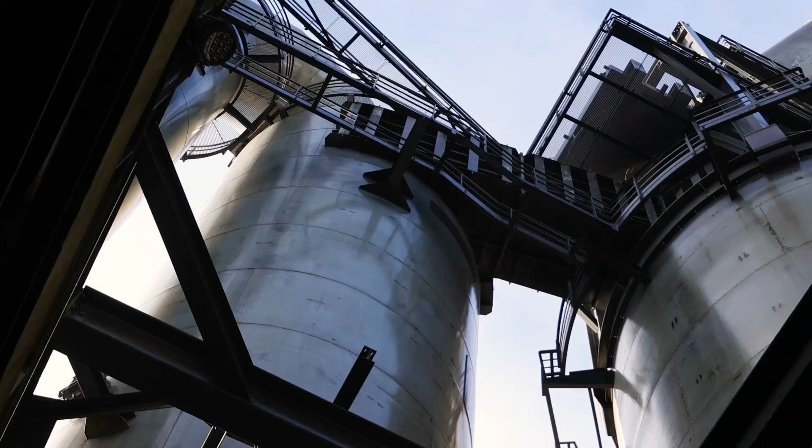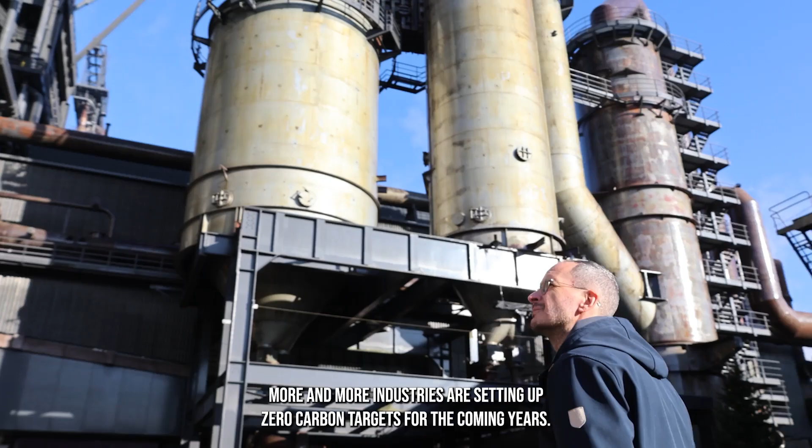Considering the effects of climate change on our society, more and more industries are setting up zero carbon targets for the coming years. Since the major source of emissions relates to energy consumption, renewable energies and hydrogen are key solutions to overcoming this challenge. But what if industries improve their energy efficiency first? In particular, what if they recovered and valorized excess heat instead of letting it go to waste?

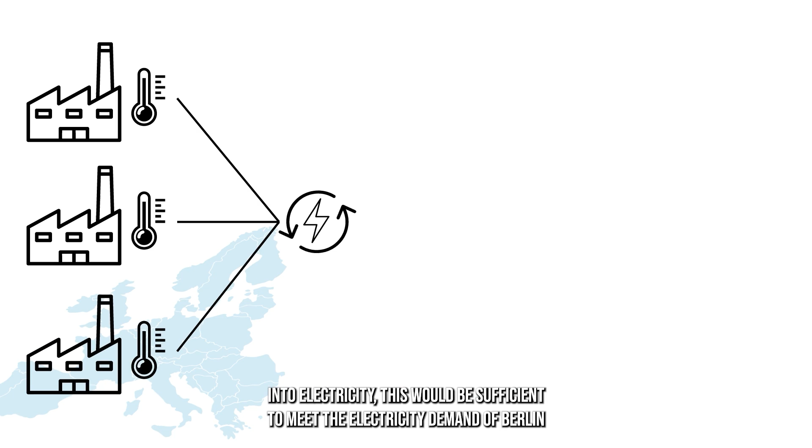By 2030, about half of all global energy will be released as waste heat. If the heat of the off-gases of European plants could be recovered and converted into electricity, this would be sufficient to meet the electricity demand of Berlin, or even meet the demand of Luxembourg twice over. But how should the energy be recovered? At what temperature and mass level? And once it's been recovered, how can we best valorize it?

And this is where ValueHeat comes in. Our platform collects the different tools that we've developed on the topic of waste heat valorization at the Luxembourg Institute of Science and Technology. By providing process engineers and energy auditors with ready-to-use calculation and optimization tools, ValueHeat not only supports them in their day-to-day assessments, but also unlocks the untapped waste heat potential of industries.

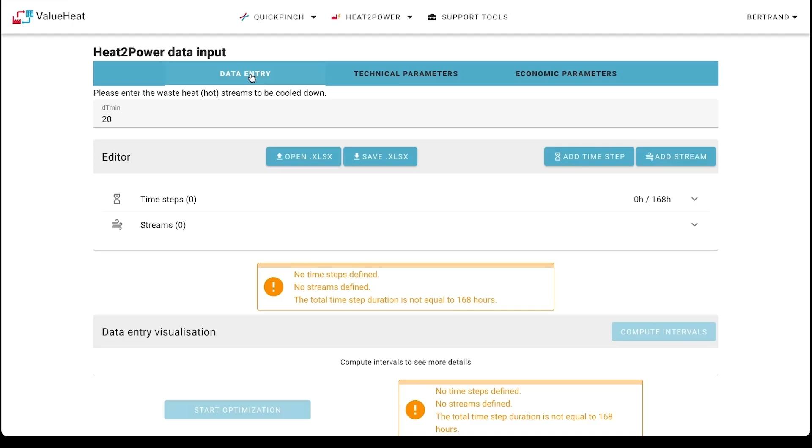Two solutions are currently available: Quick Pinch and Heat to Power. Quick Pinch is an easy-to-use, free solution for managers and engineers looking to estimate their waste heat potential. It provides quantified data regarding steam and electricity production, as well as heat supply to 3 different types of district heating systems. Heat to Power, on the other hand, is an optimization software focused on electricity and steam production from waste heat, and is specifically designed for process engineers and energy auditors.

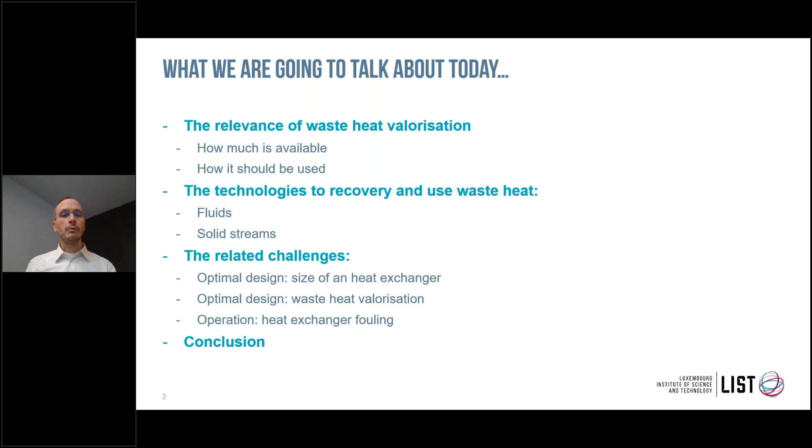In the next step, we're going to talk about related challenges. So it's mostly about optimal design of waste heat valorization, and then also a crucial point, its operation, mostly fouling problems which are limiting waste heat recovery. We will then move on to the conclusion, and after the conclusion, we will move on to your comments and questions. So why are we talking about waste heat valorization? Why is it even relevant?

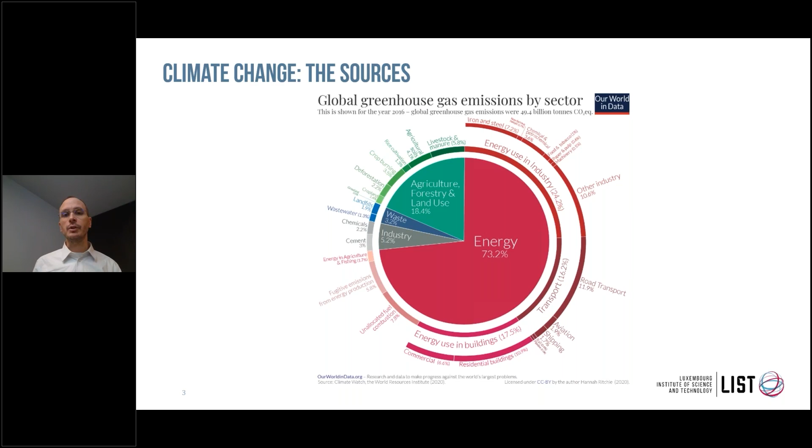Well, if you look at the broader scope of one of the major challenges of our society, which is climate change, we see the main source of greenhouse gas emissions is related to our energy consumption. And the issue is that basically when we are looking at our energy consumption, only about 40 to 50% are indeed being used; the rest is being emitted as waste heat. These are really being lost to our environment. So when we see this kind of value, we realize that our processes are not that efficient, and we should actually see to recover this lost energy.

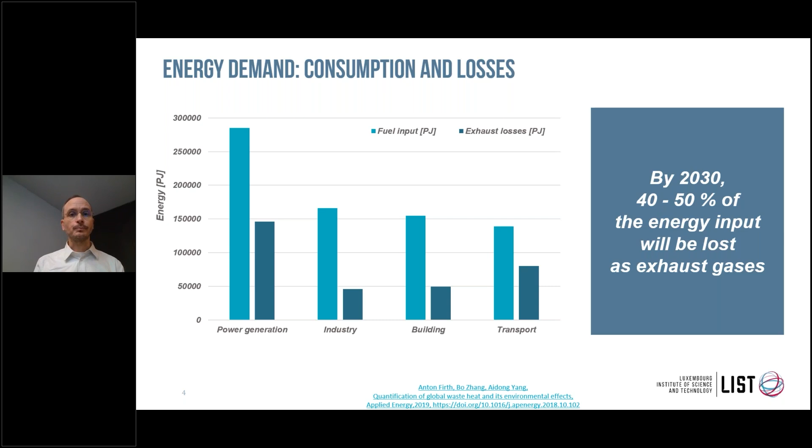So what are the common waste heat sources? We don't need to go and look very far. Actually, at home already, we have the showers, or simply our bathtub, where we are using hot water for a short time and then emitting it to the sewer. So that's a source of waste heat that we have already at home. Another source is our non-electric cars, for example, when you see the efficiency of the cars.

Currently, it's about 30 to 40%. The rest is being lost as heat. We do use part of this heat to heat up the inside of the car, but for the rest, it's being lost again to the environment.

Another source is ventilation systems. So it's ventilation at home or in production halls or in data centers, where we basically need fresh air. And this fresh air is used to replace old, heated up air. And this hot air could actually also be recovered because it's also lost energy to the environment.

Of course, the biggest block of waste heat is related to industrial production, industrial systems. So here it's mostly about the off gases, where we are burning fuels to produce heat to transform certain processes. But here, when we're considering the off gas temperatures and the quantities that are emitted, we are losing a huge amount of energy.

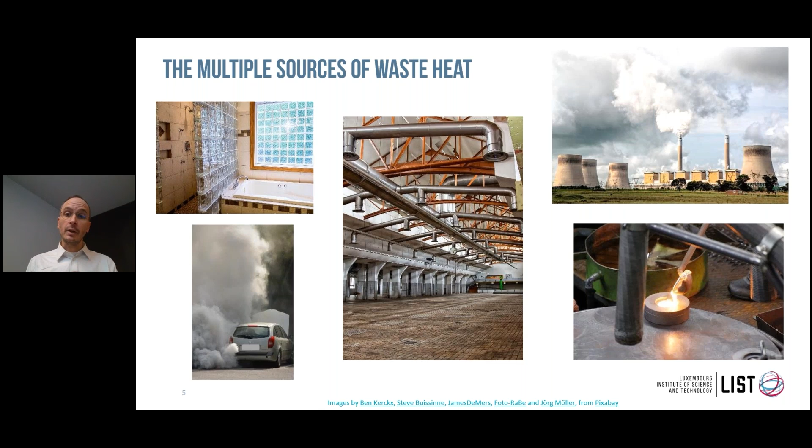Another possibility is the solidification of liquids. For example, in the glass or steel industry, where we are forming certain kinds of materials, and once they've been poured, they can cool down to their actual form. But this cool down process, again, it's lost waste heat.

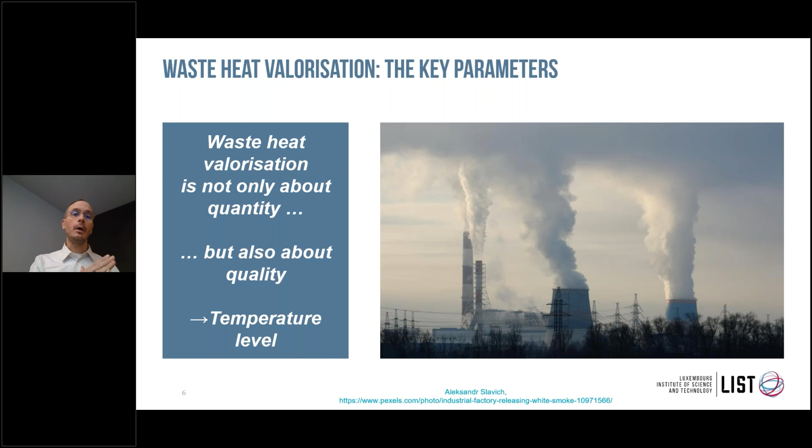So waste heat valorization is not just about quantity, but it's also about quality. And this is really a very crucial aspect. I've had many discussions about mostly data centers, where we see a huge amount of waste heat available. But the problem is, data centers come up with very low temperature waste heat, and basically we can't do much about it. So when we are thinking about waste heat, quantity and quality are both equally important.

When we look at the potential, there are no formal concrete values on waste heat potential. There are now more and more projects trying to quantify in a better way the waste heat potential in the different sectors. Here you see a more recent study done at European level concerning the waste heat potential in the different industries.

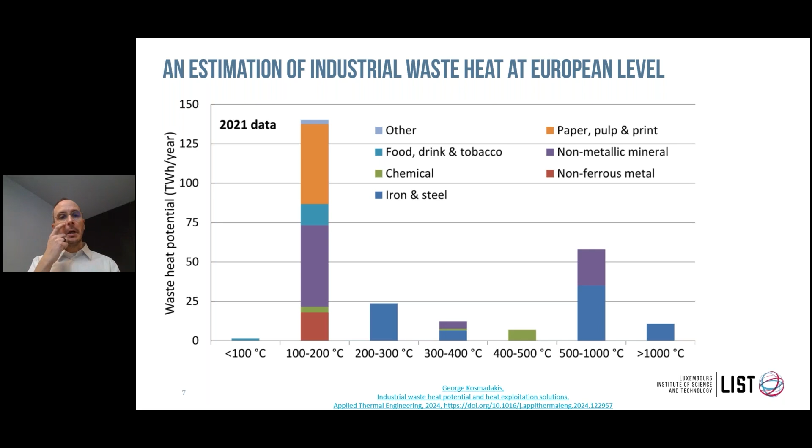We see that the biggest share is between 100 and 200 degrees, but between 500 and 1,000 degrees, related to, for example, the glass and steel industry, there's also a very important potential. Of course, what we don't see here is the potential from data centers. I've been looking into it and didn't find recent values. With the increase of AI and data management, this is going to be a topic, but again, it's low quality waste heat, and it's difficult to do something really sensible out of it.

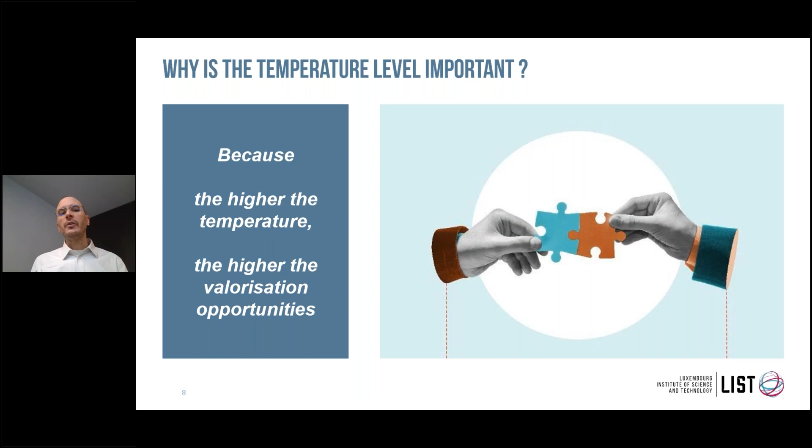Why is the temperature level really that important? Well, it's simple. The higher the temperature, the more valorization opportunities we have. So we can on one side do waste heat recovery for process preheating, for drying, so that's direct waste heat valorization. We can also use this waste heat to produce electricity through standard turbines, through ORCs, or through thermoelectric generators.

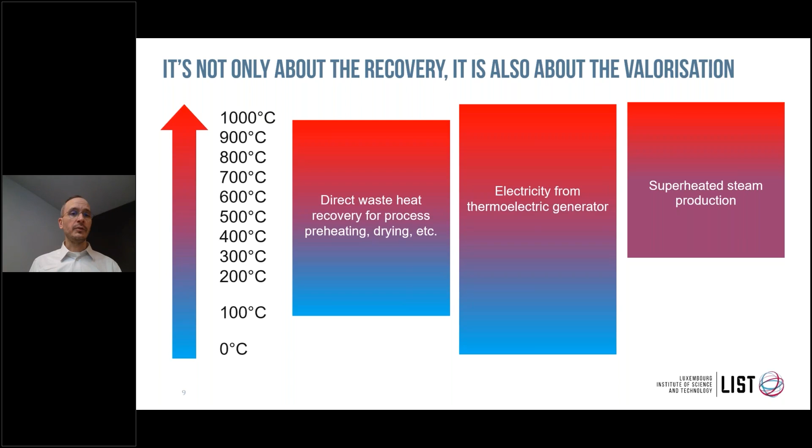We can also use this waste heat to produce superheated steam. At a lower temperature level, we can produce saturated steam, chilled water or fresh water. We can also start producing hydrogen, although with related electricity consumption. Or for very low temperature applications, we can inject this waste heat in district heating systems.

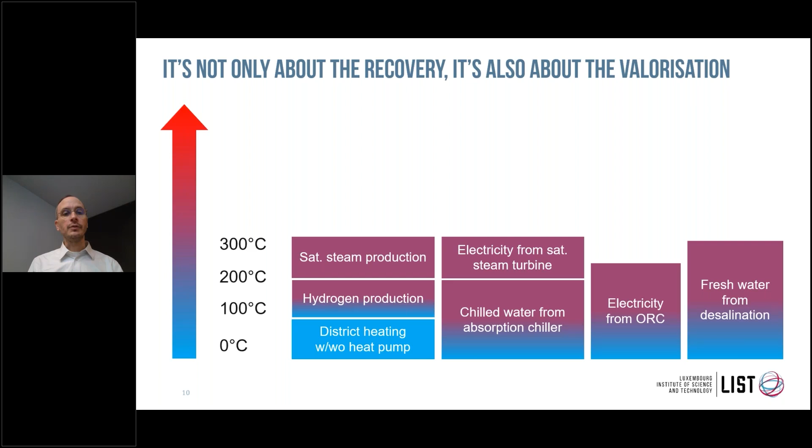Again for data centers, we would need a heat pump to increase the temperature level. Unfortunately, this means we are going to consume electricity again to reach a good level of quality. So looking at the actual values of waste heat valorization at European level, there were some estimations on what is available in terms of waste heat and how it could be valorized.

So when we see, if we were to valorize the industrial off gases in the EU, we could produce about 13 terawatt hours of electricity per year, and we could save about 4.4 megatons of CO2 emissions per year. And this is by doing waste heat to power solutions.

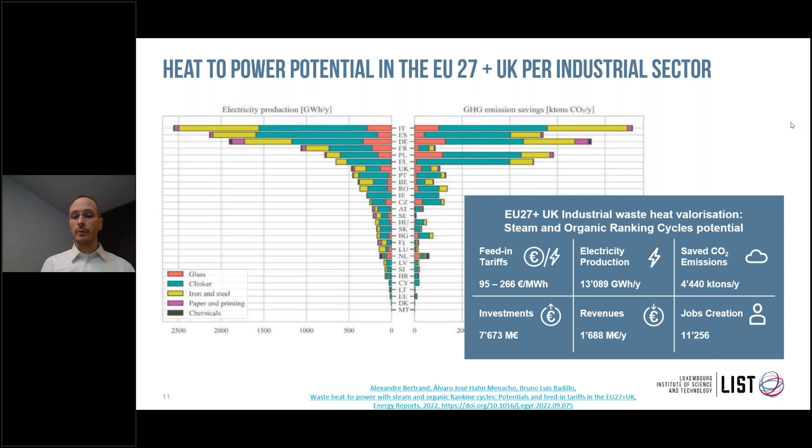We can, of course, replicate the reflection and see, okay, what would happen if we were to use this waste heat for district heating systems? Here, the biggest problem is that as opposed to electricity production, to do waste heat valorization to district heating, of course, you need a district heating system next to it.

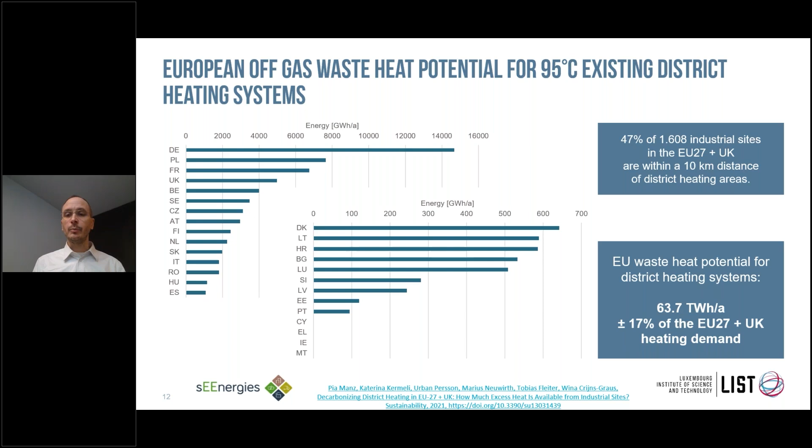But it was very interesting. There was a European project that actually addressed this question, and they realized that for quite a large number of industrial sites, about half of them were within a distance of 10 kilometers. So there is some potential to connect and use this waste heat for district heating systems nearby. So if this waste heat was indeed valorized, taking into account this geographical constraint, we could cover about 17% of the heating demand at European level.

Another possibility is to do waste heat recovery at home, not only in the ventilation, but also on our gray water. I already mentioned before the shower, the bathtub, but also the laundry water or the washing machine. So we do have several sources of waste heat, and we've done several assessments.

Of course, for, let's say, old buildings, that doesn't play a role, but this solution is going to become more and more important in the future, since our buildings are being more and more well insulated. The air losses that we have through better ventilation are reduced. Now the next challenge will be to recover the waste heat that we have in our gray water. And here we've done several scenarios.

So we've seen that if we were only to concentrate on the shower waste heat recovery, we could save up to about 10% of the electricity demand required for the heating demand in a near zero single family house. And this value could go up to almost 30% if you're really pushing it to the maximum. So that means waste heat recovery, but also decreasing the hot water temperature from 55 down to 45 and so on.

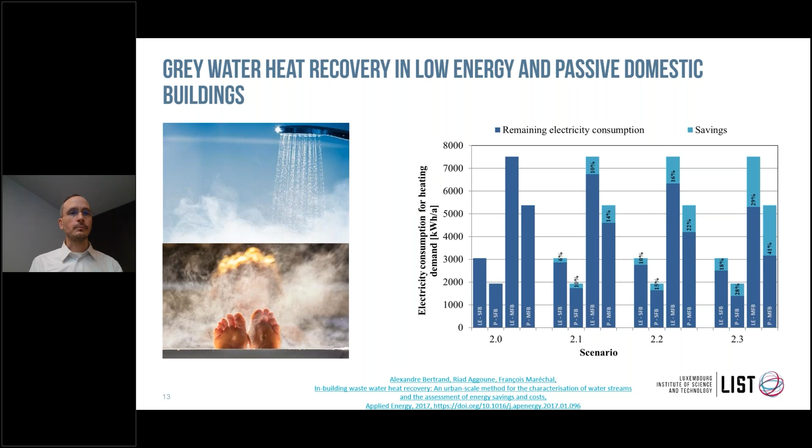So actually there's also quite a lot of things to do for our gray water, and one of these measures is to valorize the waste heat of the water. In terms of market potential, it was estimated that this whole market at the global level would reach about 134 billion euros by 2030. And the biggest markets are already now North America, Europe, and Asia. And the major applications will most probably be electricity production, internal use of the waste heat for production, and also district heating systems.

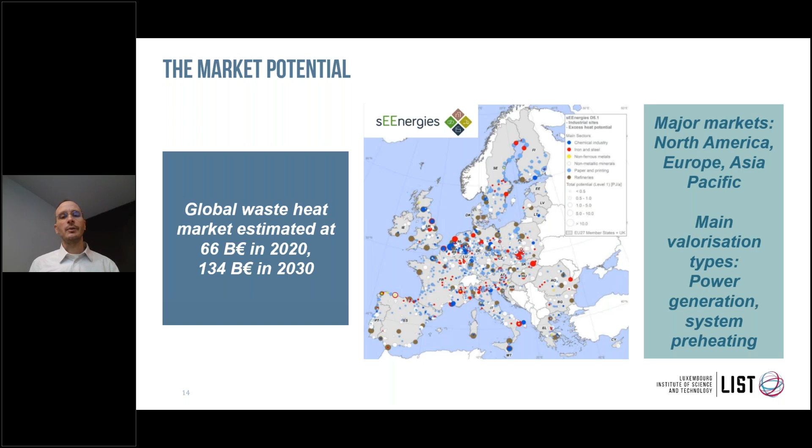So now that we've seen the actual potential and see that there are things to do, the question is, how are we going to recover this waste heat? So for those who are not in the field, how does it work? Well, basically, at least for liquids and gases, we need a piece of equipment called a heat exchanger, where we basically put the two fluids in contact. We have a hot fluid, typically the off gases, and a cold stream, typically fresh air that we want to preheat, or fresh water that we want to preheat.

And in the heat exchanger, we are putting the two streams in contact via a system of tubes. So in the tubes in this diagram, you see that we have the hot stream circulating, and around these tubes, we have the cold stream that we want to heat up. So that means that the two streams are not mixed. They're still separated, but the heat transfer can occur over the bundle of pipes.

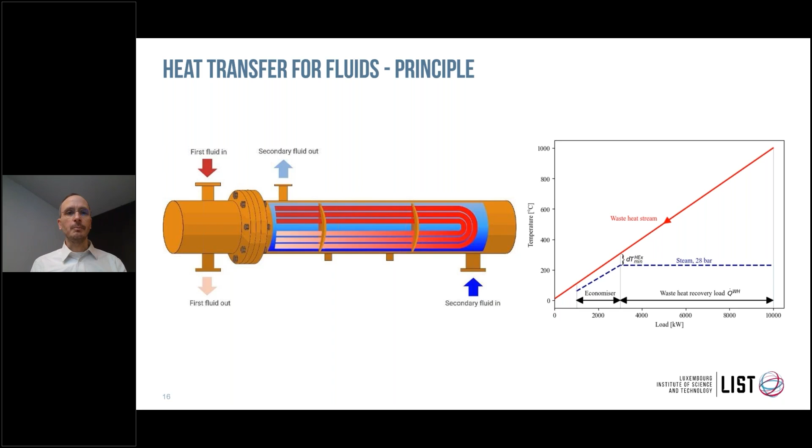So the most standard pieces of equipment for liquids and gases are on the left side. You see the tube bundle of a shell and tube heat exchanger. These are very often quite large pieces of equipment in industrial plants. We can also see in the picture in the middle plate heat exchangers, which are very useful because they can be very compact and very easy to dismantle for maintenance.

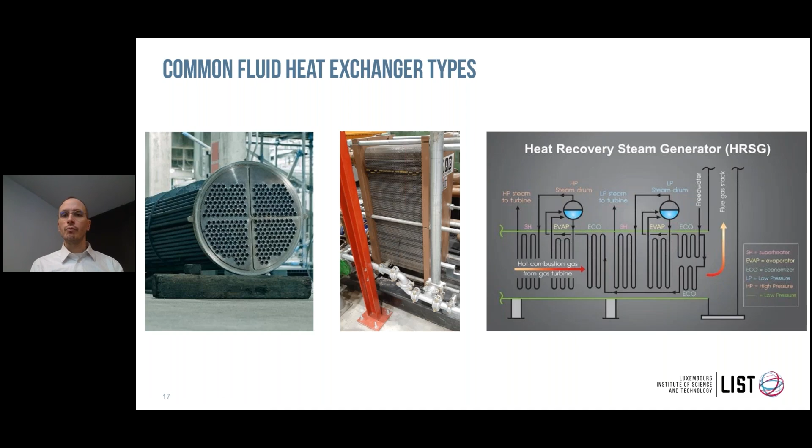Or in certain cases, we can also deploy heat recovery steam generators, which are really major pieces of equipment. In this case, we circulate, for example, flue gases to cool down. And on the other side, we have fresh water circulated within the steam generator so that the water can be heated up and evaporated, and if necessary, even superheated to, for example, be injected in a turbine.

Solid streams, waste heat recovery is definitely something else. Here we have the big problem that there's not one-size-fits-all solutions. Shell and tube, plate heat exchangers are really standard pieces of equipment. In the industries, the know-how is there. But once we start talking about doing waste heat recovery from solid streams, it's really way more difficult.

Why are we talking about this? Well, solid streams are also a source of waste heat, and we should also try to recover it, of course. There are not yet values about this potential, but McBrien in 2016 did at least some estimation and stated that about 28% of the heating demand of a steel plant could be covered by standard waste heat recovery technologies, but this value could increase up to 44% if solid streams were included. This was a theoretical value.

And as a side note, we are actually working exactly on this topic to see how different technologies could be deployed to recover waste heat from solid streams. As an example, you see on the left side the slag pouring. So slag is basically the residue that you obtain from steel melting. And this is basically molten lava. Think about doing waste heat recovery from a controlled volcano. It's exactly this kind of problem.

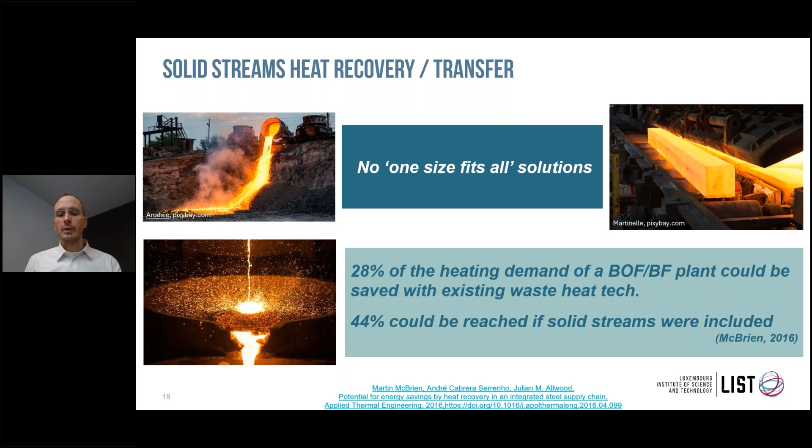Another technology that could be considered is to use this hot beam and put it in a container with a sand-like material. The heat would then transfer to the sand-like material. Once the beam is cooled down, we could take it out of the container and bring in a new steel beam, which needs to be preheated before entering a furnace. This preheating would then occur through the heated sand-like material, so that we have heat transfer from the material to the steel beam. So that's a very specific solution for the steel industry, but it's also one technology to do solid stream heat recovery or heat transfer.

So apart from this solid stream waste heat transfer, what are the main challenges to waste heat valorization? The first one is the optimal heat exchanger size. What you want, of course, is the right balance between CapEx and OpEx. You're investing in a heat exchanger to save operating costs, to reduce your energy consumption, to reduce your CO2 emissions. But that also means investing in the heat exchanger. The bigger the heat exchanger, the more energy you can save, the higher temperature you can recover.

Unfortunately, that means that the heat exchanger becomes, of course, more expensive. But if you do a too small heat exchanger, then the temperature level that you get out of it won't be very high. And that means that while you will have saved at the CapEx level, you won't see much difference on the OpEx side by the waste heat recovery. So here in this case, it's really necessary to find the right balance, to do a thermoeconomic optimization between the area of the heat exchanger, the size of the heat exchanger, and the cost related to that.

Another issue also to take into account in practice is the space availability. We've had the case in some industries where the installation of a heat exchanger was partially constrained by the space available around. And that's also a very big topic when you're thinking about a heat recovery steam generator, because this can become a very large piece of equipment.

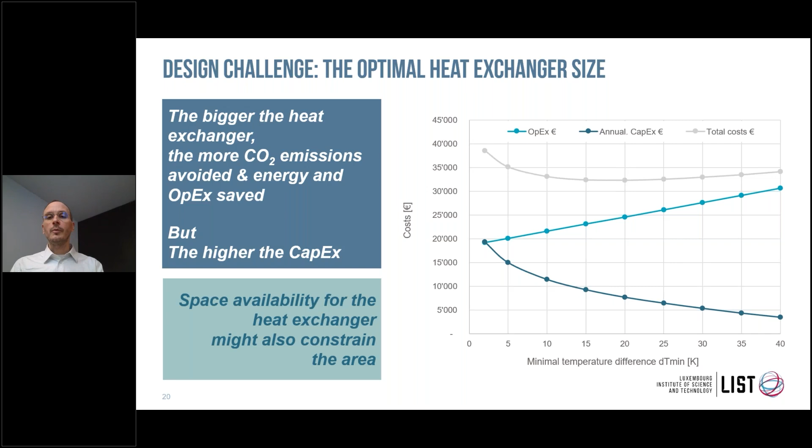The second challenge is the actual optimal valorization, because waste heat is not only about recovering it, it's also the question of once you have it, what do you do with it? And that's the challenge, because it's not necessarily just one solution, but you could make more out of it if you were to mix the valorization opportunities.

Think about doing waste heat recovery from your off gases. You first produce electricity, you cool down the off gases, and then you keep the rest of the waste heat at a lower temperature, for example, to supply heat to district heating that is nearby. So that is one possibility. There are multiple configurations to take into account.

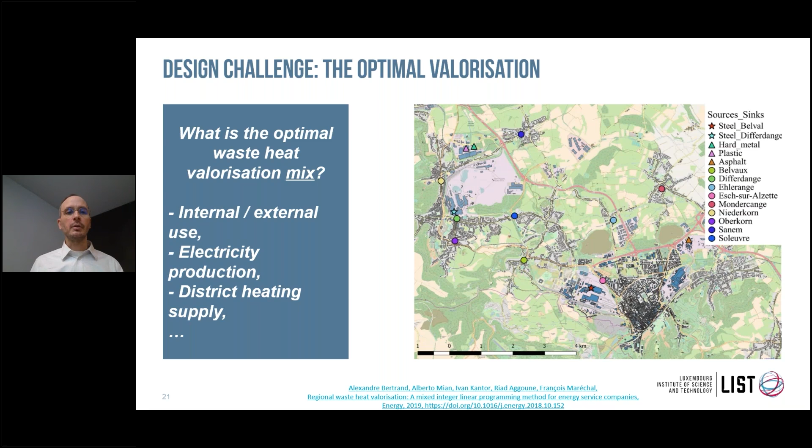Here as an example, we took the case, what you see is the south of Luxembourg with two steel plants. And the question that was raised was, okay, we do have waste heat. How shall we valorize it, considering that we have the possibility to produce electricity, that we have nearby district heating districts, or that we have even industries that might be interested in using our waste heat? We developed a specific optimization problem for that.

And of course, if the price was at the end too high, then nobody was interested in using the waste heat, and nobody would gain any use from that. So here it's really finding the right balance, taking into account the technical feasibility, but also the economic aspects of selling, buying the waste heat, the CapEx involved and so on. So these involve quite a lot of variables to take into account that can be really challenging.

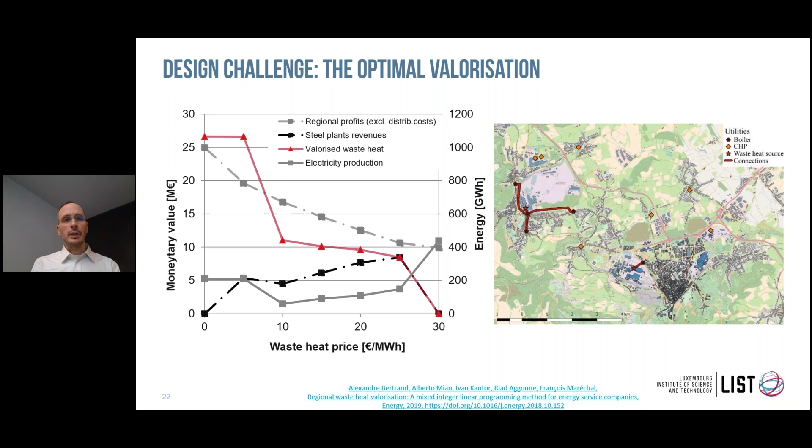Once you have waste heat, or at least once you have a heat exchanger, you really have to take into account maintenance. Maintenance is really central. Here I'm talking about tube and plate heat exchangers. Heat exchangers are not very complex pieces of equipment. They are quite static, but they really require maintenance, because if you don't look into that, you will have problems of fouling, meaning that over time you will have the formation of certain particles in the tubes, around the tubes, and the heat transfer efficiency will decline over time.

We had also the case of certain industries installing heat exchangers, and after 3 years told us, well, you know what, we dropped it because it was not working. We were not seeing any difference. Yeah, but in that case, they didn't look sufficiently into the maintenance of the equipment, into the cleaning of the equipment.

You can have different kinds of fouling types. A big one is corrosion, of course. You can have the slow formation of rust, which is going to decrease the heat transfer within the heat exchanger, and if you're unlucky, over time it can even destroy the equipment. Another possibility, of course, is dust formation, so sedimentation within the heat exchanger. So here in this case, it's really a problem of having solids being entrained within, for example, the flue gases.

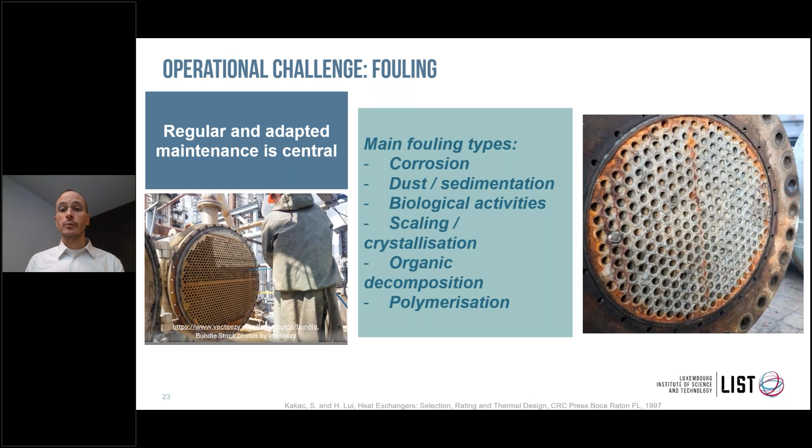That's also tricky. The scaling problem, if you don't overdo it with the temperature level, that can also work, but it's really case by case. So this fouling effect is really central to make it work, to really have a good waste heat valorization.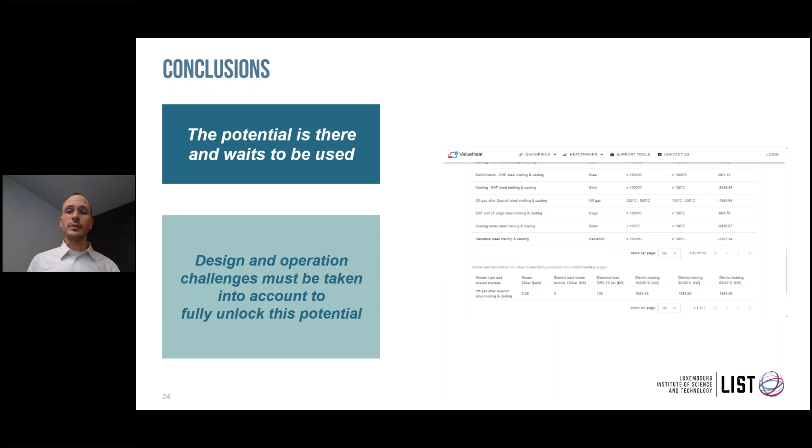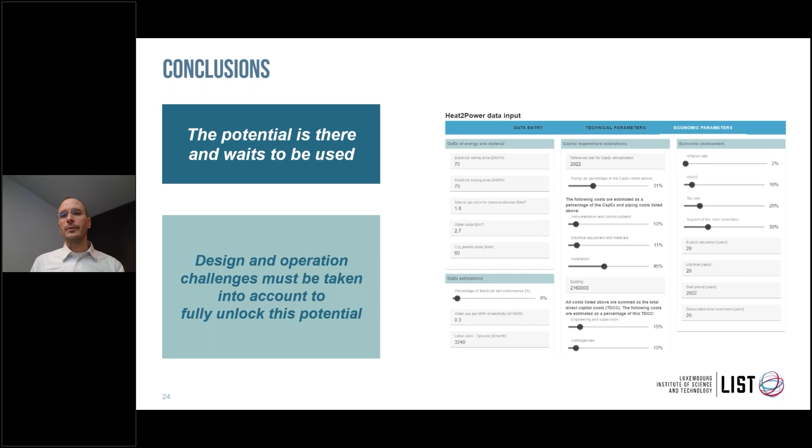We are working on this topic. And of course, we cannot help you with the maintenance, sorry for that, but we can help you with the optimization of your waste heat valorization. And you see in the screenshots here, this is the heat to power tool. We are now working with ArcelorMittal on waste heat valorization on solid streams. That's the next step. So the conclusion is there is a potential there.

We should use it to address cost, OPEX reduction, but also climate change. And with that, we can definitely have an impact. It won't solve everything, but it's part of the puzzle, and it should be taken into account.